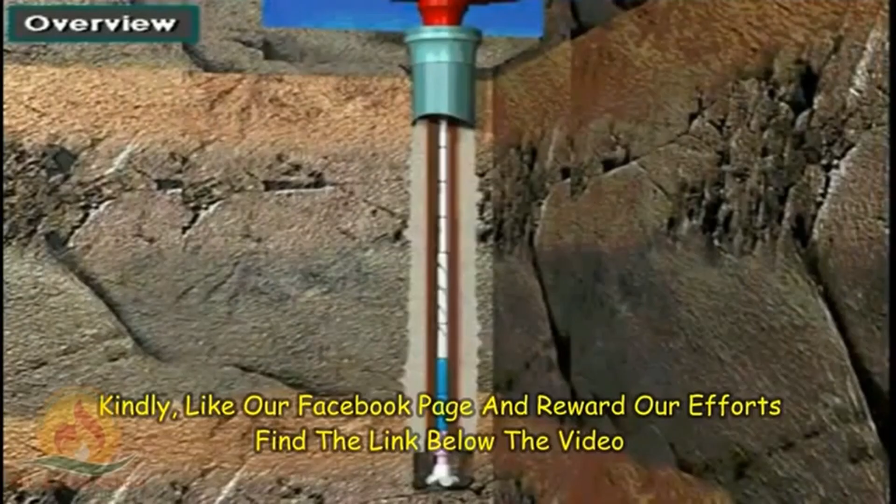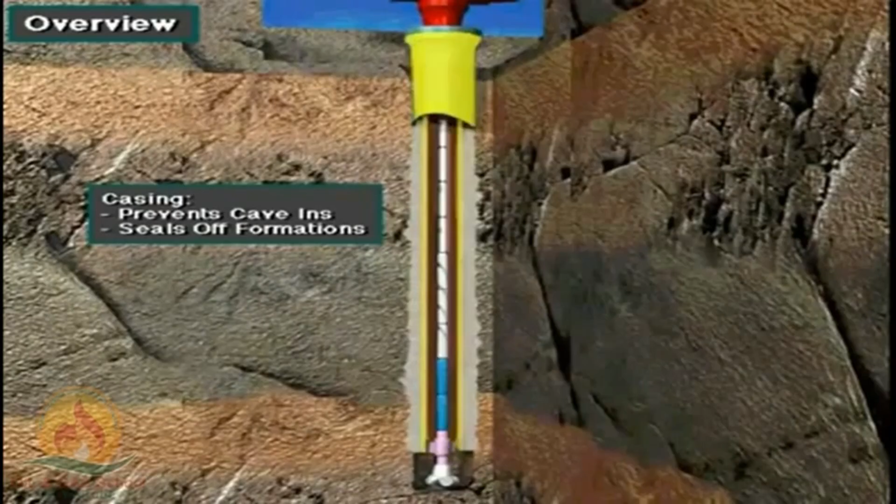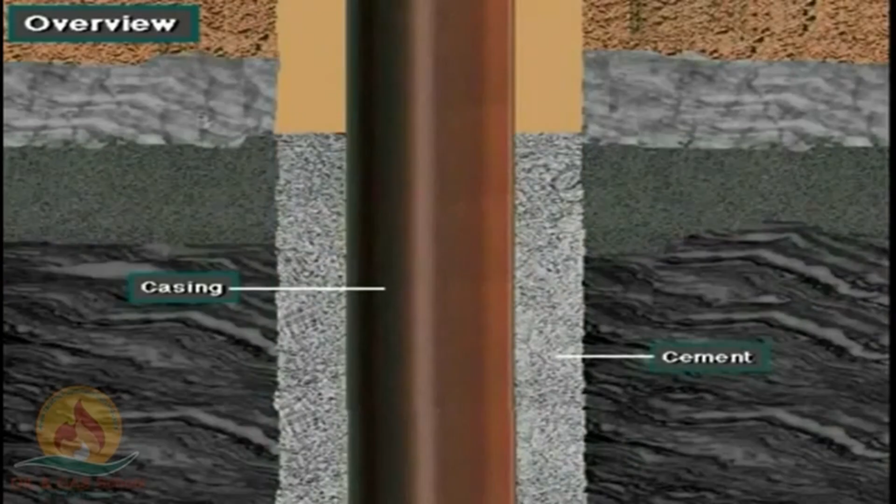Virtually every well drilled requires casing and cement. Casing is steel pipe that the crew puts into the well bore. The casing prevents the hole from caving in and seals off formations. To do its job, though, the casing has to be cemented in place. A cement crew pumps cement down inside the casing and up the annulus. The cement hardens or sets to hold the casing in place.

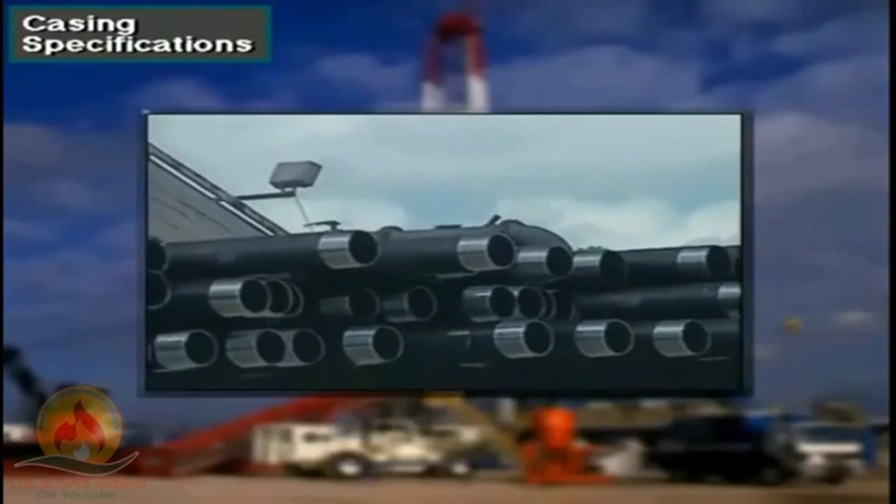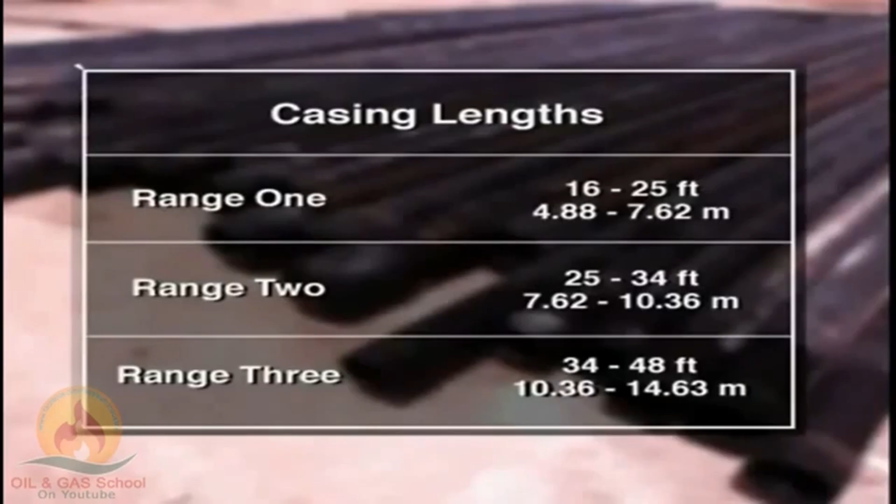Casing is steel pipe that comes to the rig in individual joints. A casing crew couples the joints together to run them into the well bore. Casing comes in 3 ranges of length.

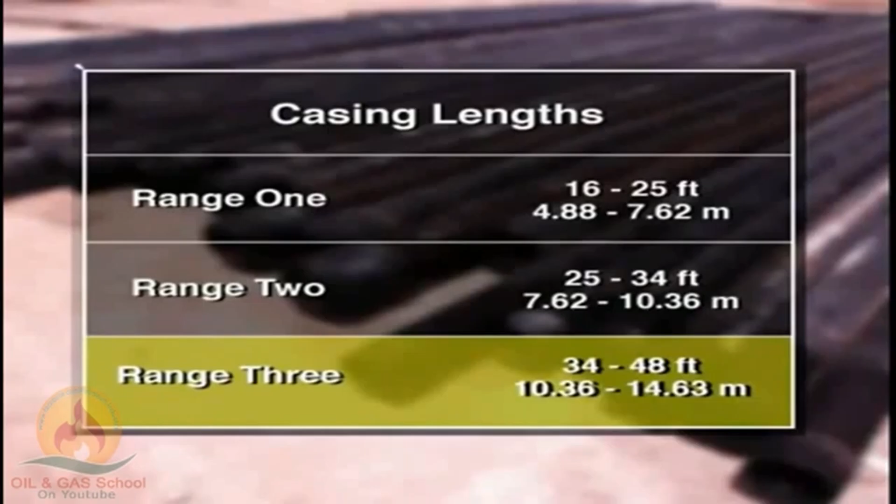Range 1 is 16 to 25 feet, or 4.88 to 7.62 meters long. Range 2 is 25 to 34 feet, or 7.62 to 10.36 meters long. Range 3 is 34 to 48 feet, or 10.36 to 14.63 meters long.

The length used depends on the well owner's requirement and the physical requirements of the well. Casing also comes in different grades or strengths. Which strength is used depends on the well's characteristics.

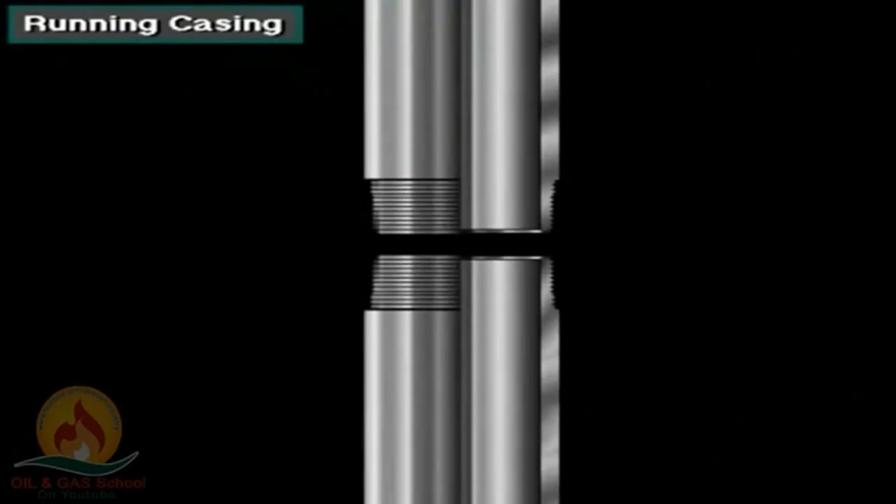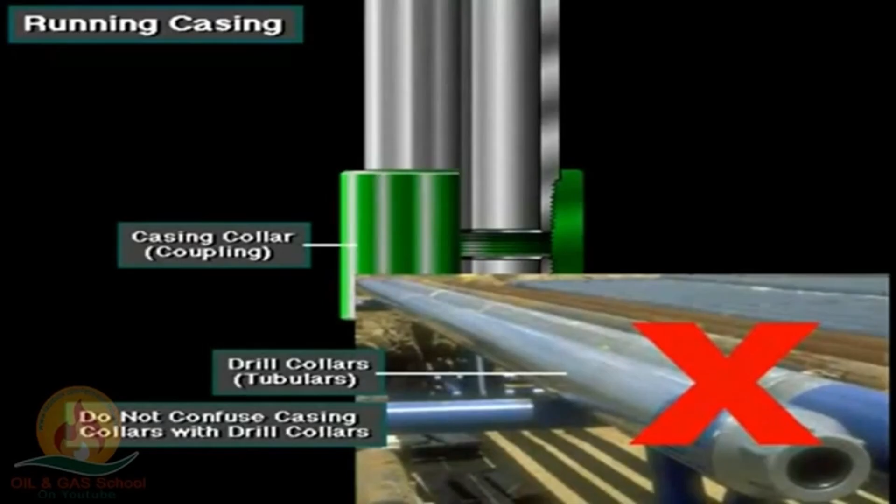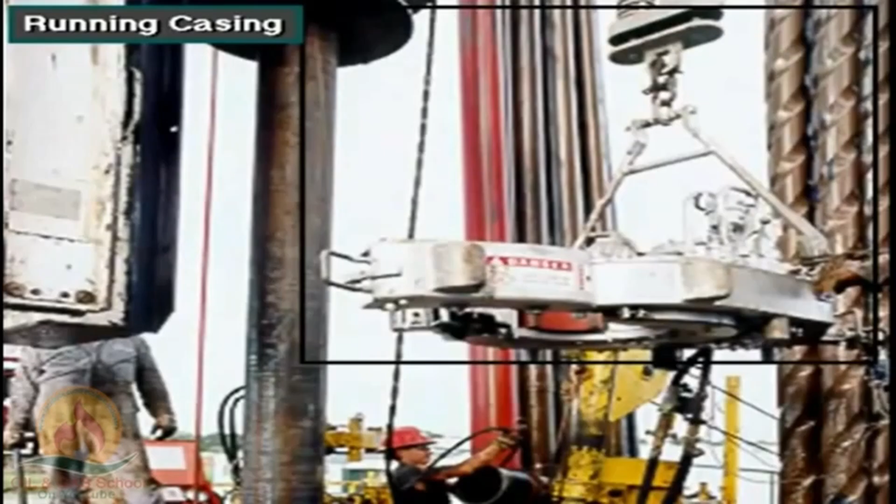To run the casing, the crew joins the joints with threaded connections called couplings or collars. Do not confuse casing collars with drill collars. Casing collars are couplings. They use special heavy-duty elevators and large casing slips, called spiders. They make up the casing joints with multi-speed power casing tongs. Power casing tongs not only screw the threaded connections together, but also torque them to the correct amount.

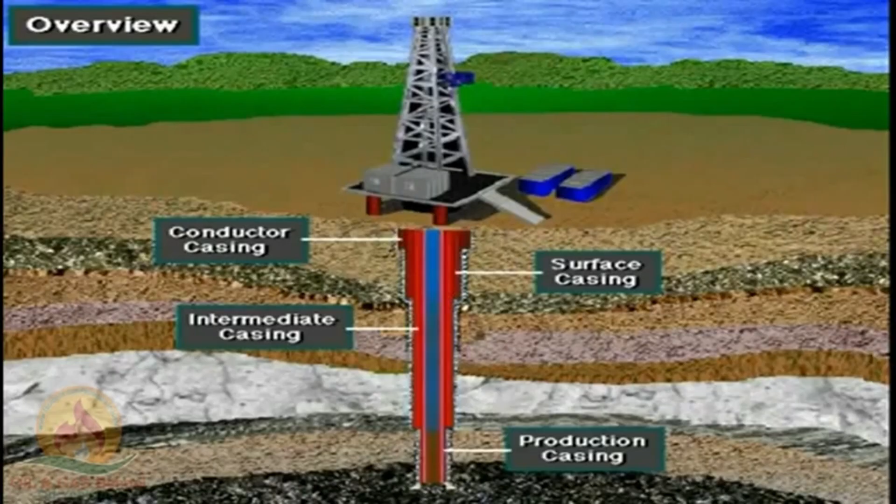By the time the crew drills the well to final depth, it usually has several strings of casing in it. These strings are called conductor casing, surface casing, intermediate casing, and production casing. Notice that the cased well looks something like a telescope pulled out to full length. That is, as the crew drills the well deeper, the size of the hole and the size of the casing gets smaller in diameter. Almost always, the drilling contractor cannot begin drilling at the surface and go all the way to total depth in one step.

For one thing, formations near the surface tend to crumble and cave in easily, so conductor casing prevents cave-ins. For another thing, formations near the surface may also hold fresh water that the well cannot contaminate. So surface casing protects freshwater zones.

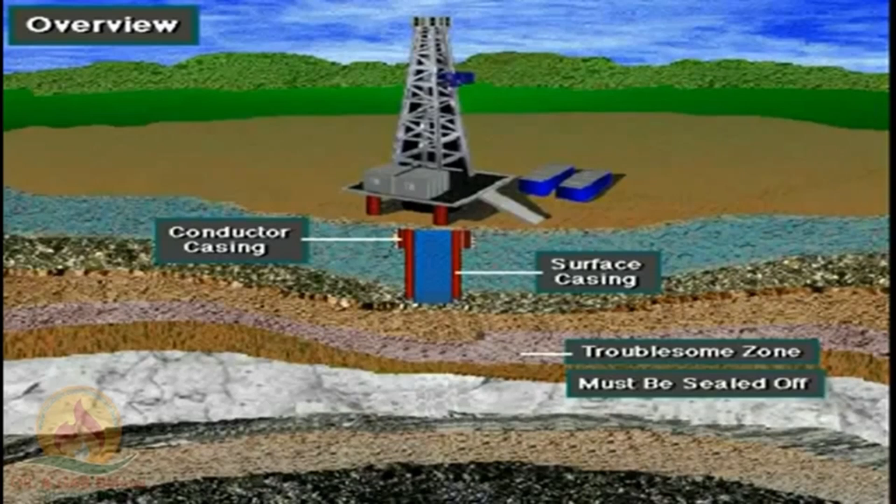For still another thing, deep formations are sometimes so-called troublesome formations. That is, they can be drilled by adjusting the properties of the drilling mud, but, once drilled, need to be sealed off to prevent problems in drilling the deeper portions of the well. So, intermediate casing seals off troublesome zones.

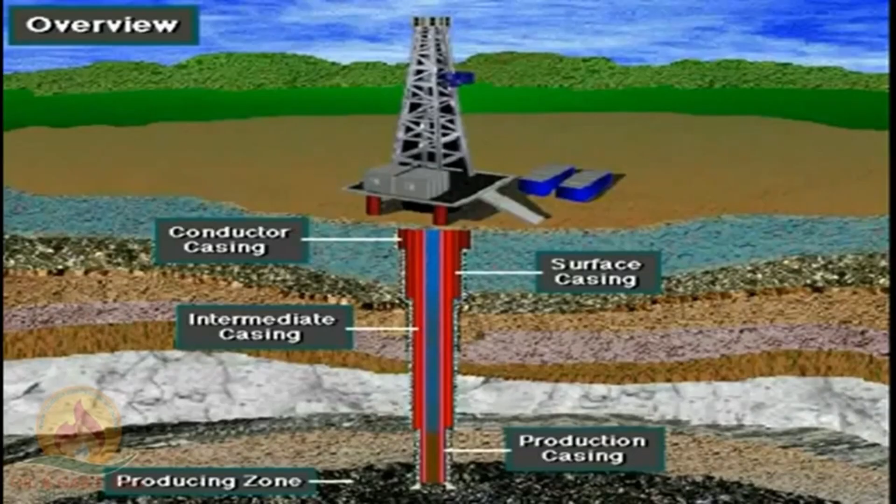Sometimes deep wells require more than one intermediate casing string. Finally, once the producing zone is drilled, it needs to be protected and sealed, so production casing isolates the producing zone. The first string of casing is the conductor casing.

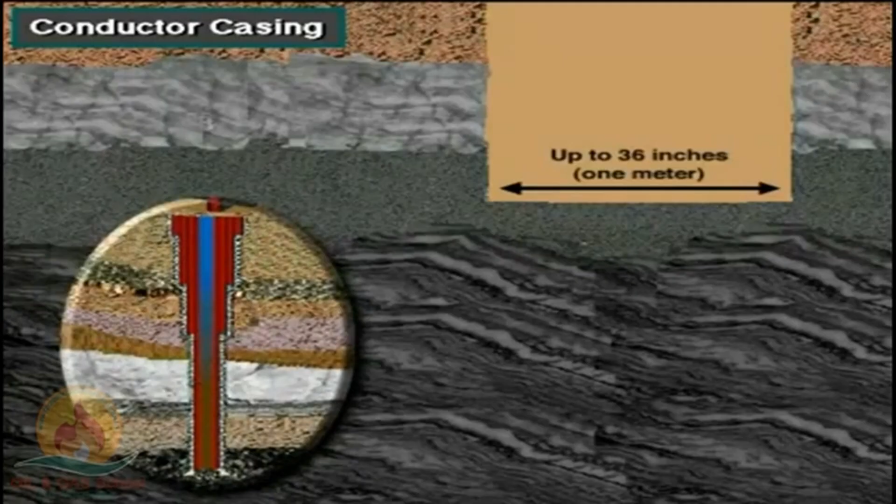The hole drilled for it is pretty big, often as much as 36 inches or more, almost a meter in diameter. The conductor hole has to start out pretty big because as drilling goes on, the hole's diameter decreases. In some cases, the rig will hammer the conductor casing in place if the ground near the surface is really soft. If the conductor hole is drilled, the casing is cemented in it.

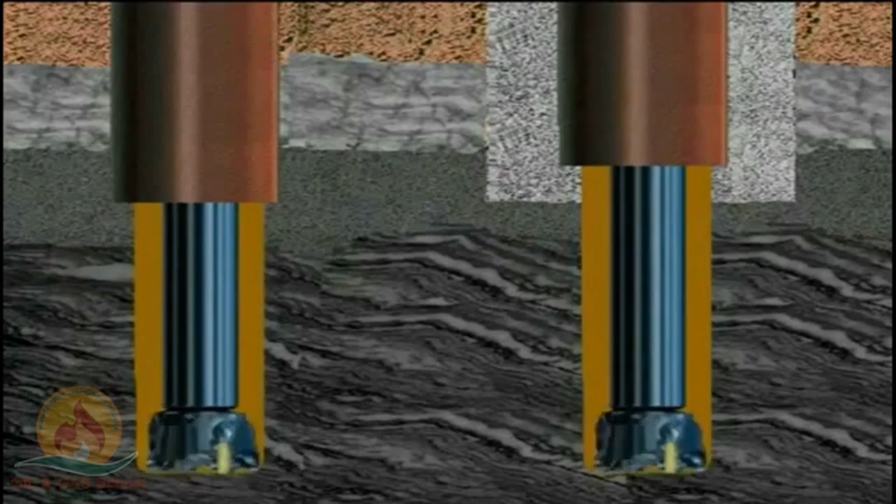Using a bit whose diameter is small enough to easily go inside the conductor casing, the rig drills the hole below the conductor to a prescribed depth. The diameter of the surface hole can still be relatively large, say 17 inches, over 400 millimeters or even more.

The surface hole's depth is usually set by regulatory agencies. They require that the surface hole be drilled through all freshwater zones, and that surface casing be set and cemented to protect the zones from damage by additional drilling operations. This depth could be from hundreds to thousands of feet or meters.

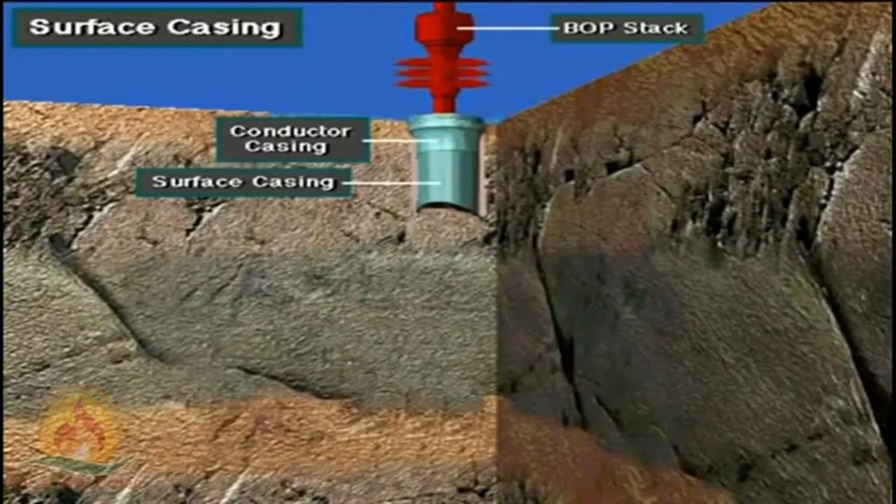Crew members nipple up or connect the BOPs to the surface casing at the wellhead. So this casing must be strong enough to support the BOP stack. In addition, it has to withstand the gas or fluid pressures the well may encounter. Surface casing also has to be strong enough to support the additional casing strings hung inside of it.

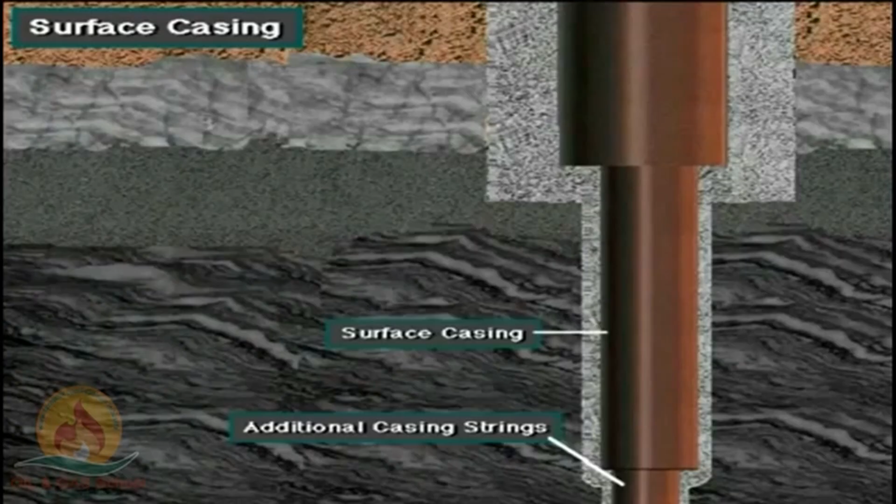To drill the intermediate hole, the operator chooses a still smaller in diameter bit, which easily fits inside the surface casing. A bit of about 12 inches, or 300 millimeters in diameter, is one example of the size. Intermediate casing is also cemented into place to seal off troublesome formations, like lost circulation zones or abnormally pressured zones.

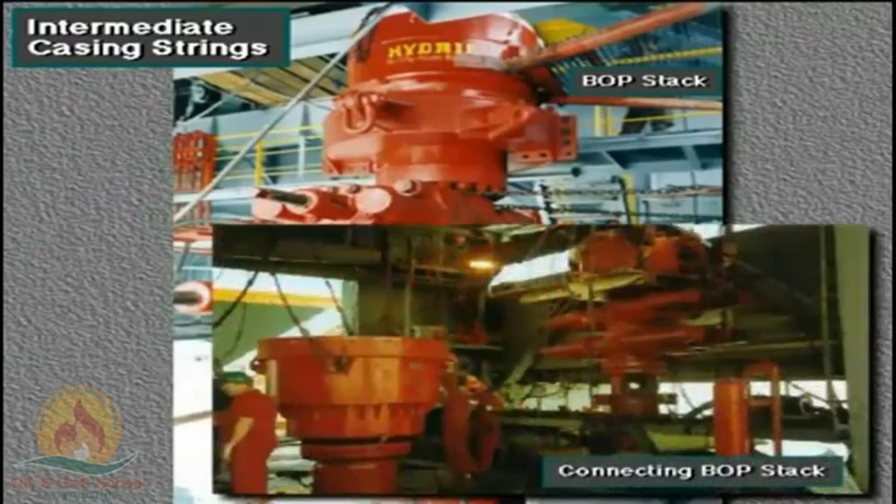It is often the longest section of casing in the well. The crew connects or nipples up the BOPs to the top of the intermediate casing using an adapter and casing head, or a drilling spool, which is stacked on or connected to the top of the surface casing wellhead. It therefore anchors the BOPs for the drilling that comes later.

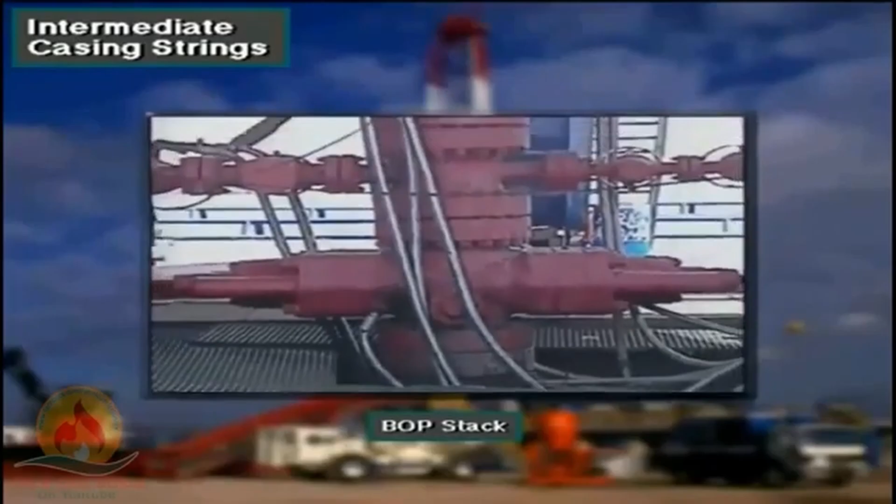Remember that the crew has to nipple up a stack of BOPs to each string of casing that is run into the well. First, they nipple up on the surface casing, then on the intermediate casing, and finally on the production casing.

To drill to final depth below the intermediate casing, the rig owner selects a bit whose diameter is small enough to fit inside the intermediate casing, say from 8 to 10 inches, or 200 to 250 millimeters.

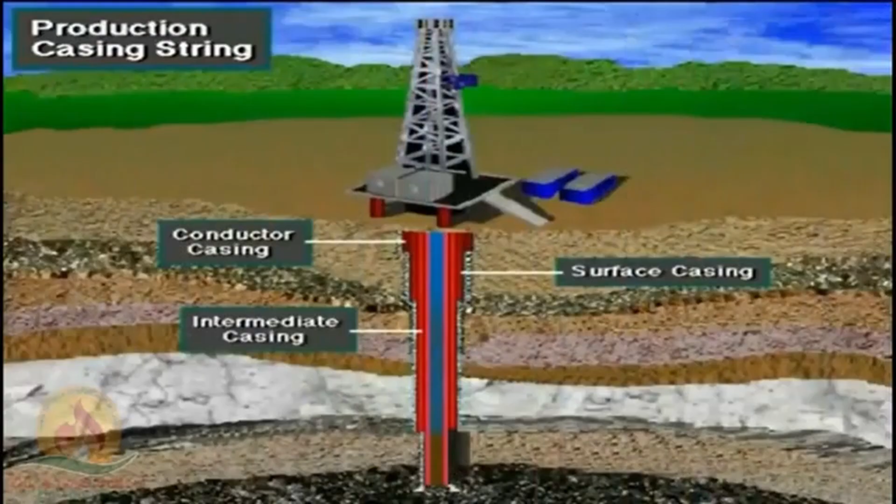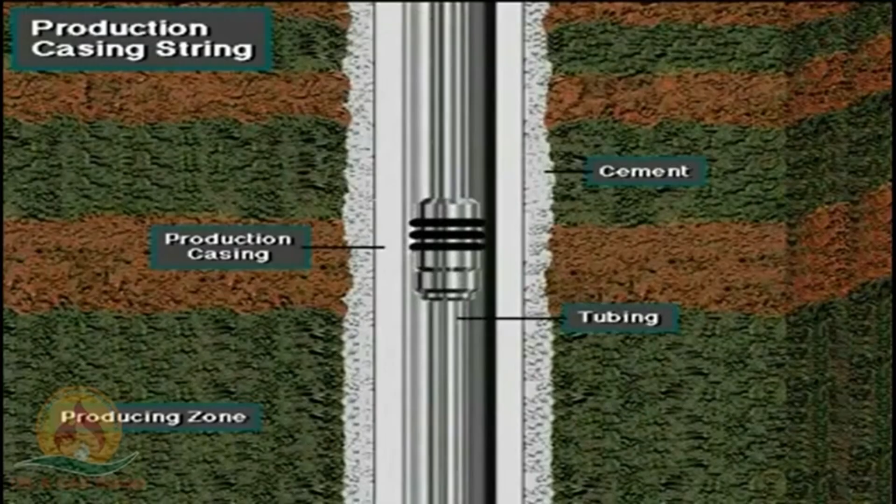This part of the hole penetrates the producing zone. When cemented in place, production casing seals off the producing zone and readies it for production. Production casing also houses and protects the tubing and other equipment used to produce the well. The operator usually perforates, puts holes in this casing, when the well is completed or ready for work to begin.

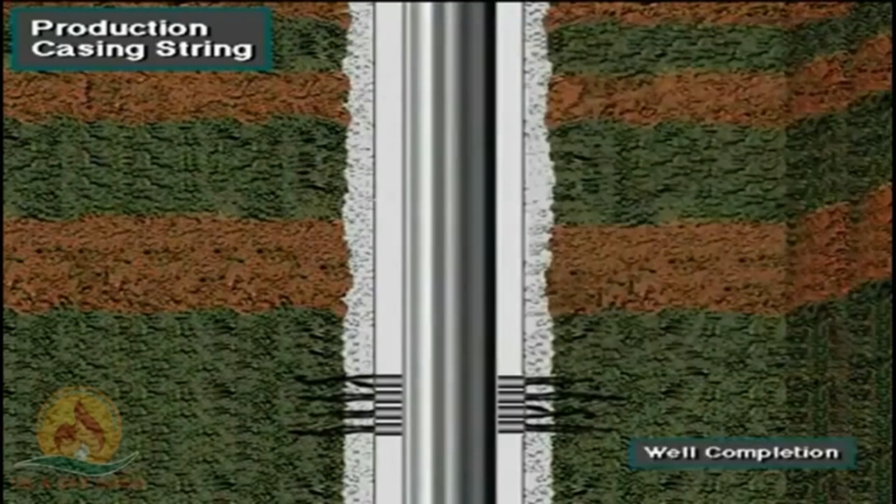Well completion is the term describing the activities and methods of preparing the well for production of oil and gas. Oil and gas flow into the well through the perforations.

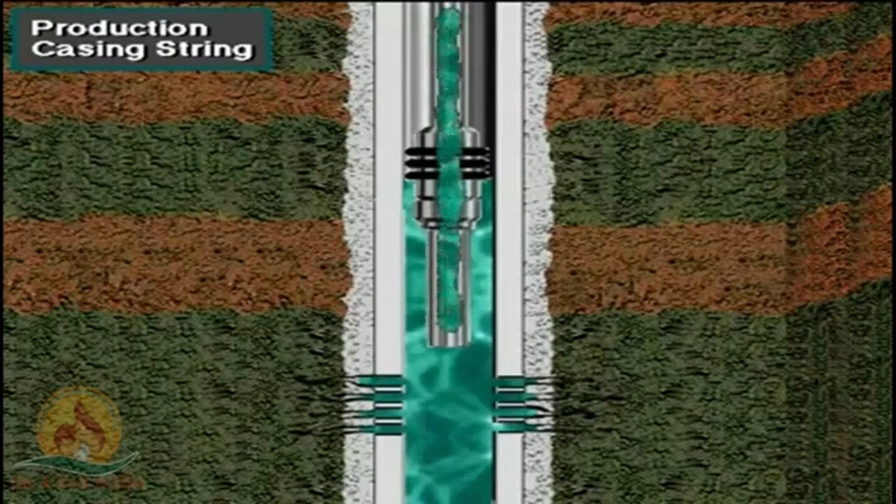Sometimes well owners run liners instead of casing into the well. A liner is a shortened string of casing used to case the smaller open hole section below an existing casing string in the hole. It's just like casing, except that a liner does not run all the way to the surface. Instead, the casing crew hangs it from the bottom of a previously run casing or liner string using a special piece of equipment called a liner hanger.

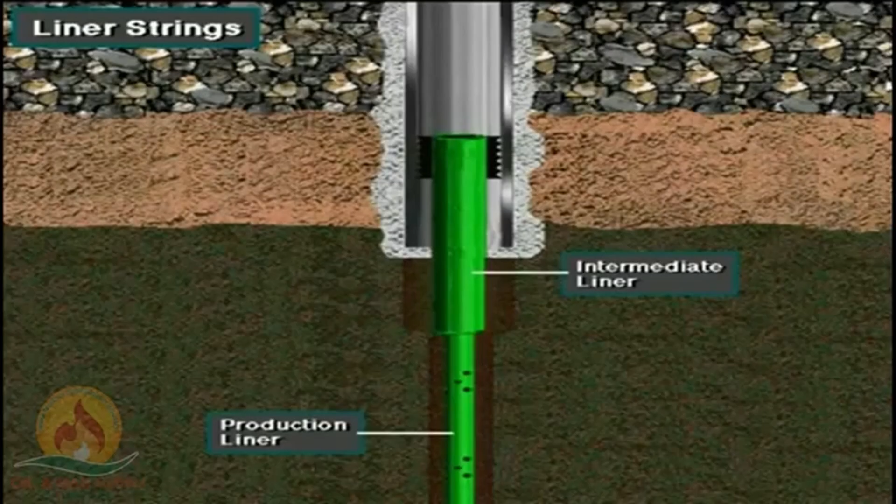In this case, there's an intermediate liner and a production liner. Using liners saves money. Because the crew will cement the casing string in place, they also have to install some special devices on the string, which come into play during the cementing operation.

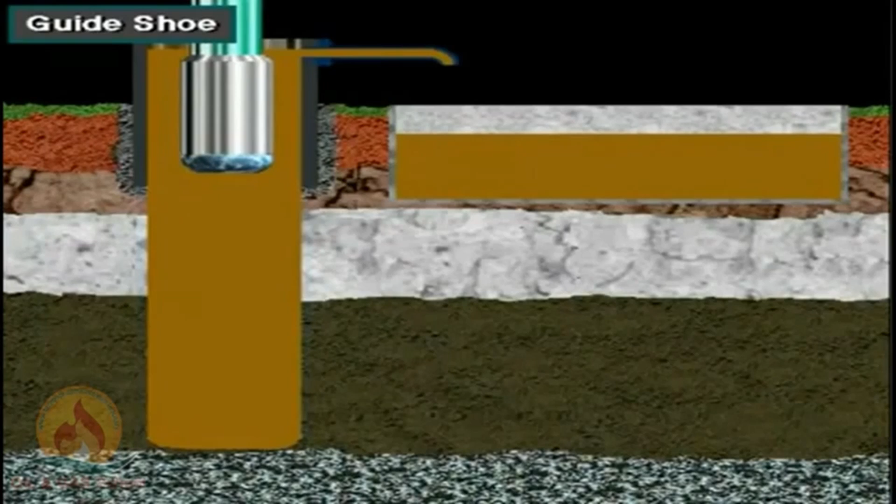The guide shoe is a heavy steel and concrete fitting that the crew makes up on the end of the first casing joint to go in the hole. It guides the casing past rough spots and ledges in the wellbore. It also has an opening in the end. Drilling mud enters this opening when the crew runs the casing into the wellbore. Later, cement will come out of this opening on its way into the annulus.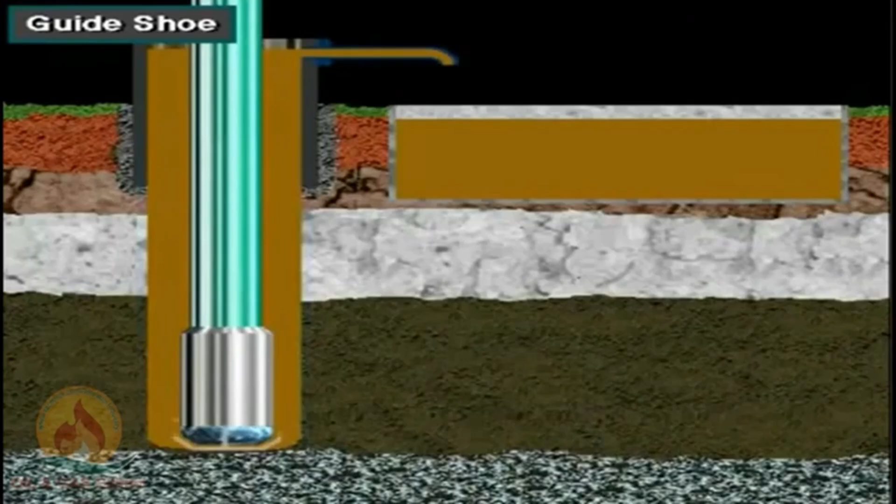Usually, the crew installs a float collar in the second or third casing joint run into the wellbore, or sometimes they install a float shoe. Whether a float shoe or a float collar is used, each has a one-way valve in it. Fluids can flow downward through the valve, but cannot flow upward past the valve.

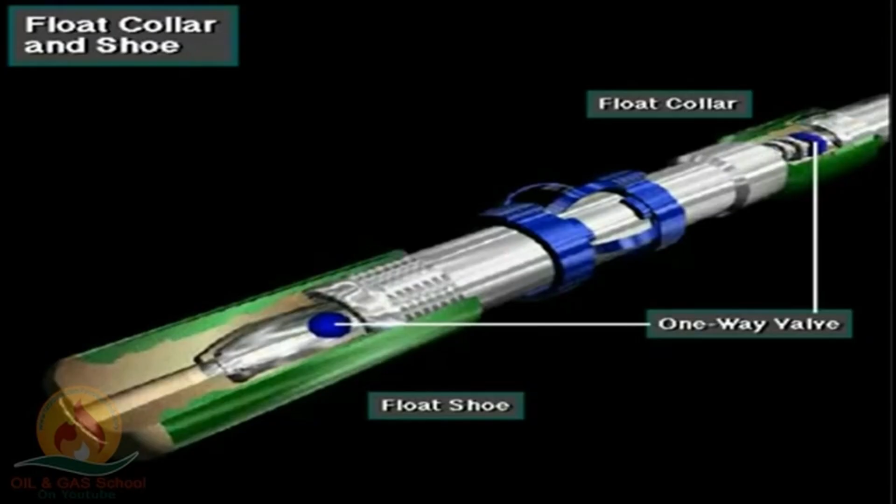The float collar or float shoe keeps drilling mud from entering the casing string as the crew runs it into the hole. Keeping the casing empty of mud allows the casing to partially float in the mud, that is, in the annulus, just as a hollow steel boat floats on water.

Letting the casing float cuts down on stress and fatigue on the hoisting equipment, but the crew cannot keep the casing totally empty of mud. If they did, the hydrostatic pressure of the mud in the annulus could crush the casing.

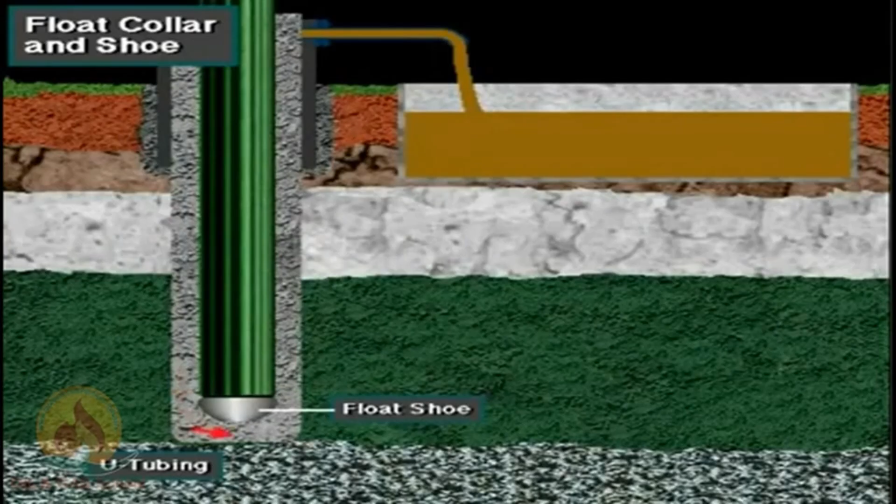So from time to time, the crew puts mud into the inside of the casing from the surface to offset hydrostatic pressure. The float valve also holds the cement in place once it is displaced into the annulus. Otherwise, it would U-tube back into the casing.

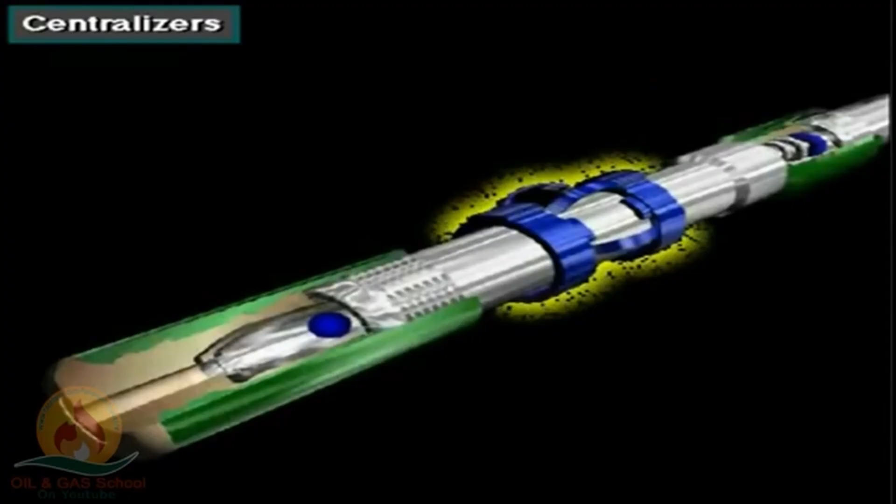On various joints of casing, crew members also install centralizers. Centralizers keep the casing from leaning against the side of the hole. In other words, centralizers keep an opening between the outside wall of the casing and the wall of the hole.

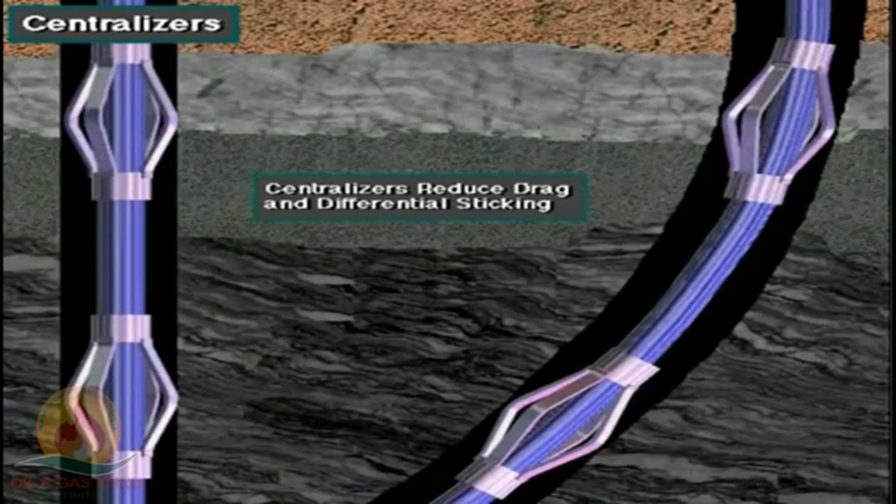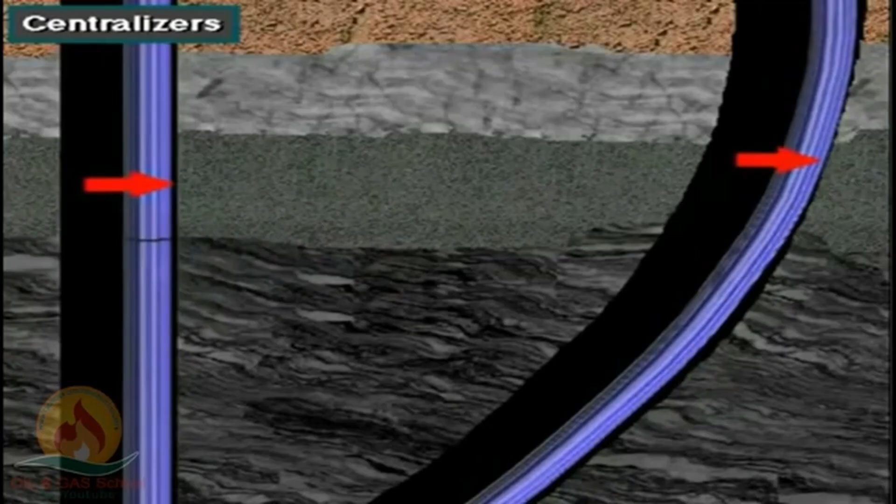Centralizers reduce drag and differential sticking while running the casing. Drag is resistance to motion caused by the casing contacting the wellbore. Differential sticking happens when the casing contacts a permeable formation in the wellbore, and the pressure in the hole is greater than the pressure in the formation. The higher hole pressure tends to hold the casing in contact against the area of lower formation pressure.

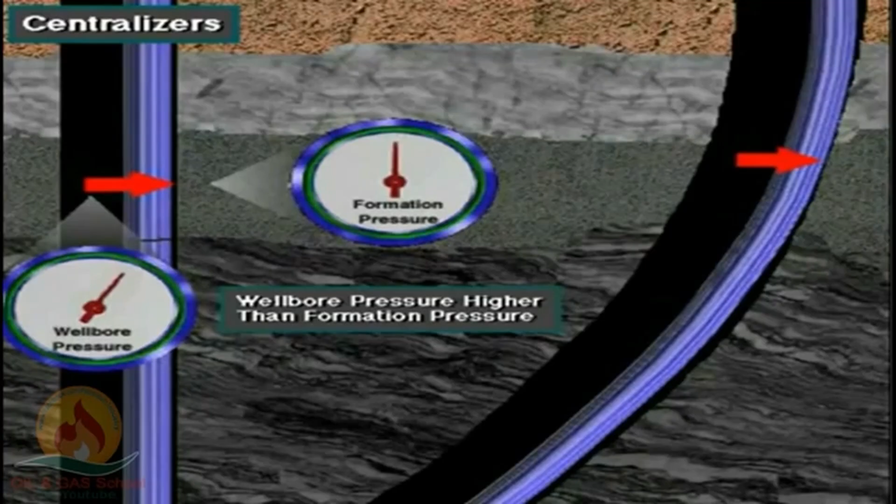Keeping the casing off the wall of the hole also ensures that cement will surround the outside of the casing and bond it securely to the hole.

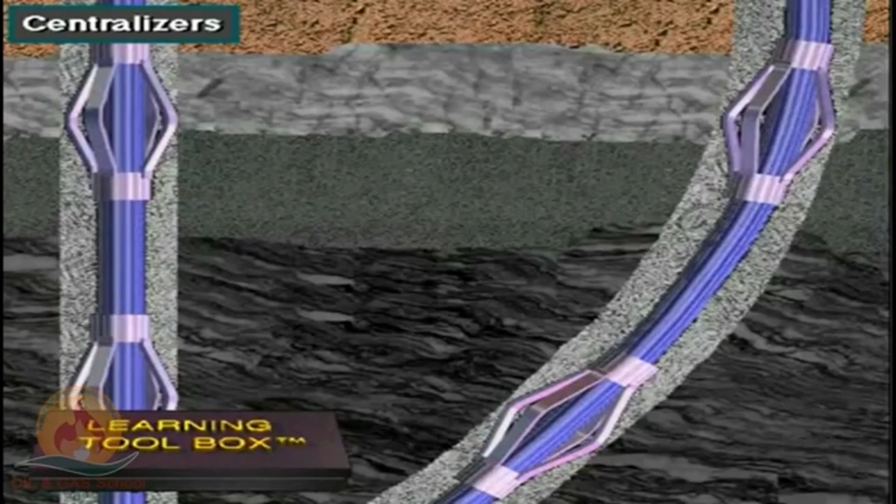Another device that helps ensure a good bond of cement to the hole is a scratcher. Depending on the wellbore's characteristics, crew members install several on the casing string. Just before they pump the cement into the casing and hole, they rotate the casing string, or move it up and down, that is, reciprocate it, depending on the type of scratchers they install.

In either case, the scratchers remove wall cake left by the drilling mud during drilling. Removing the wall cake, solid particles in the mud that stick to the wall of the hole, helps the cement bond better to the hole.

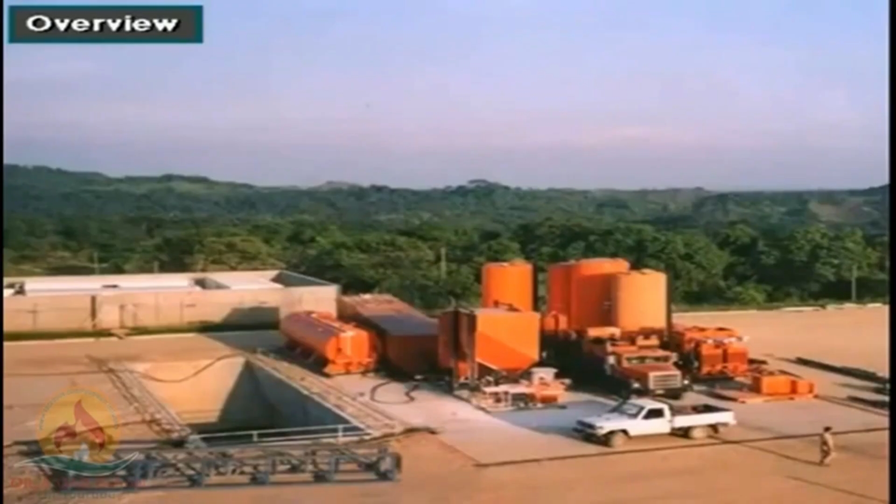Here is an overview of casing cemented in a well. Called primary cementing, the cement's main jobs are to completely isolate, or totally seal off, all the oil, gas, and water zones from the wellbore, and to bond the casing firmly to the wall of the hole.

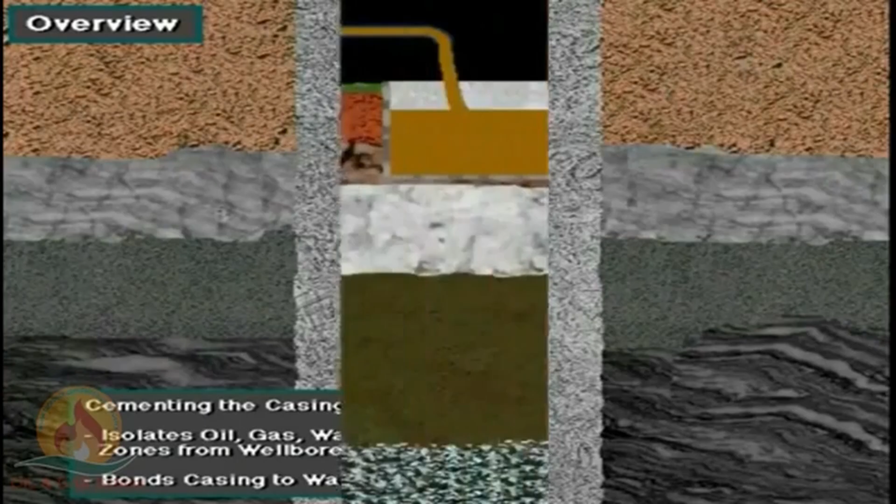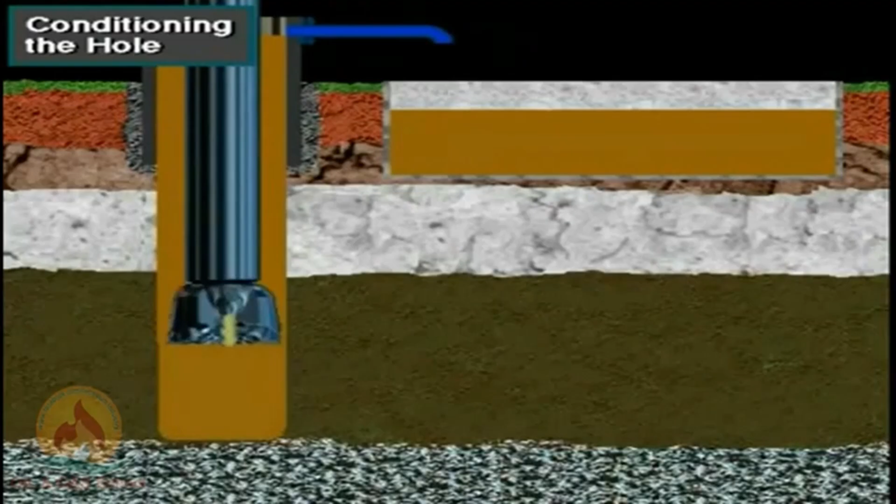Here, the crew has drilled the well to the casing point, the depth at which they will set and cement casing. The driller circulates drilling mud to clean the hole and to make sure the mud is in good condition. Then, the crew pulls the drill string out of the hole.

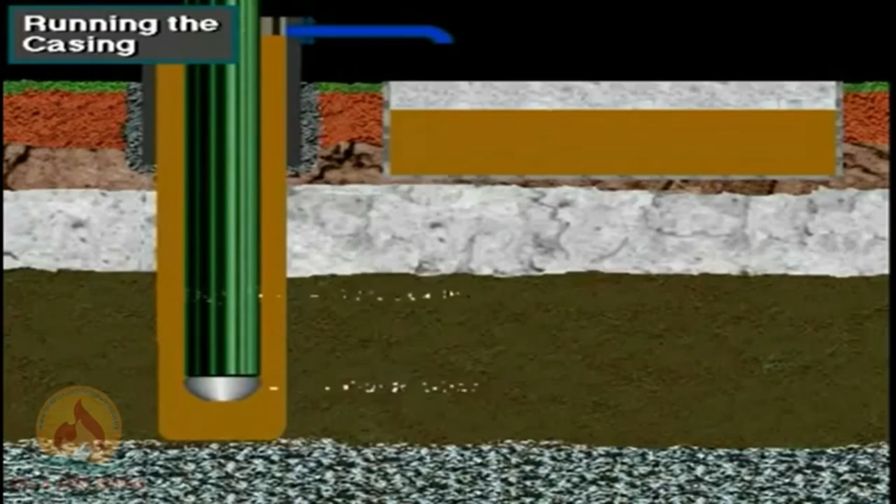The next step in primary cementing is for the casing crew to run the casing into the well, one joint at a time. Notice at the bottom of the casing the guide shoe and float collar. Also notice the centralizers and scratchers.

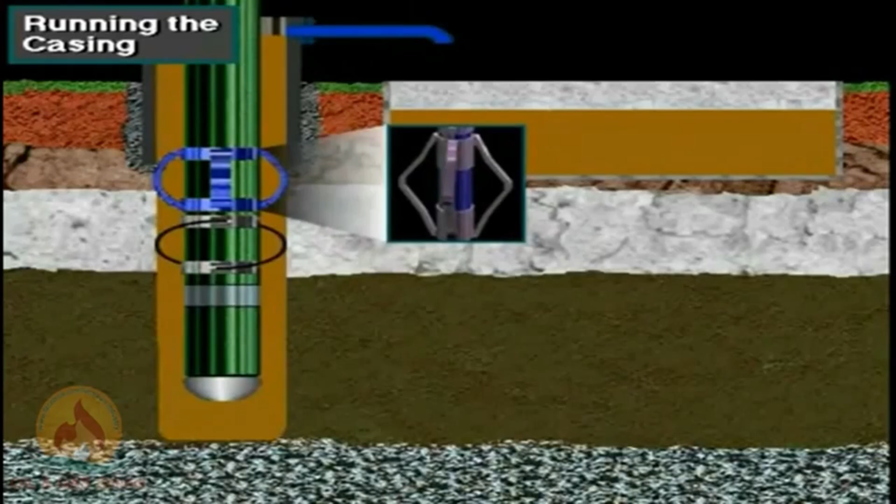The guide shoe guides the first joint of casing into the wellbore. A valve in the float collar lets the crew float the casing into the well to lessen the load on the rig's hoisting system. Centralizers keep the casing off the wall of the hole to ensure a good cement job. And scratchers remove wall cake to ensure a good cement bond to the wall of the hole.

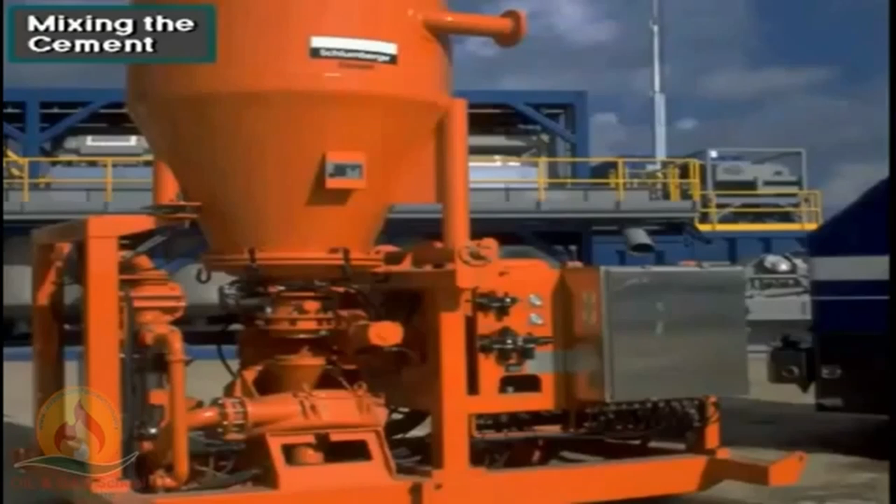The cementing crew next readies a cementing unit. The cementing unit rapidly mixes water, dry cement, and special additives to the cement to make a liquid cement slurry. A high-pressure cement pumping unit moves the slurry down the casing.

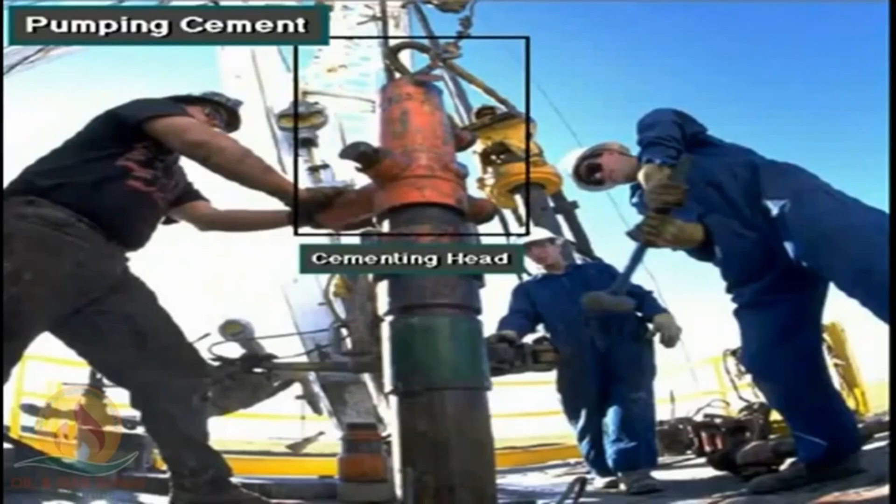To get the cement slurry down the casing, the cementing crew makes up a cementing head, also called a plug container, on the top joint of casing suspended in the rig's elevator. The cementing head has an inlet for the cement slurry from the cement pump. Slurry enters the head at the connection on the side.

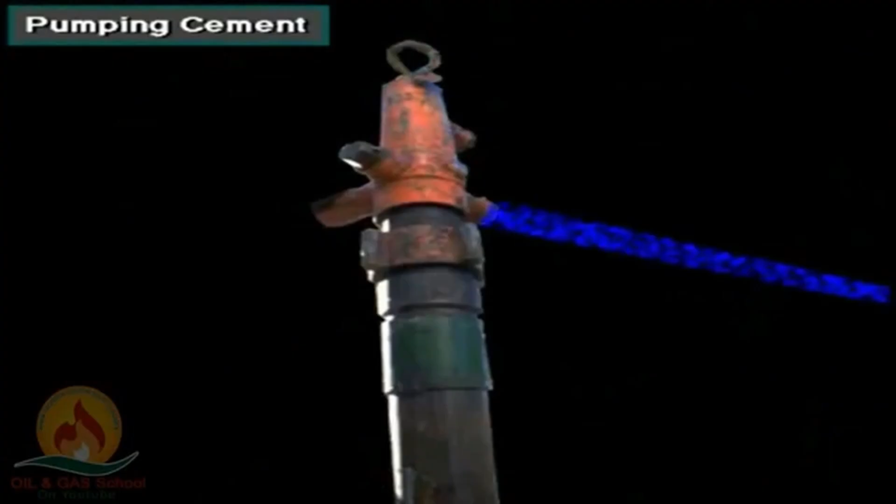The valves on the head allow the crew to control the point at which the slurry enters the head. From the cementing head, the slurry goes into the casing.

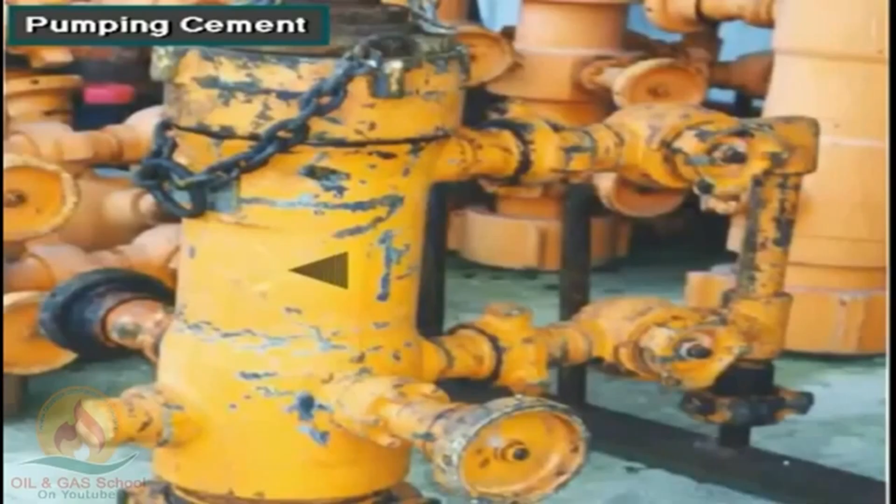The head also holds special plugs called wiper plugs. The wiper plug retainers keep the wiper plugs in the head until the crew releases them to allow the plugs to be pumped down the casing. The fluid inlet allows the crew to pump mud, water, or a special displacement fluid, the fluid that pushes the cement into the annulus. This head holds two wiper plugs, a bottom wiper plug and a top wiper plug.

The bottom plug goes into the casing first. It wipes mud off the inside of the casing and separates the mud from the cement. The top plug follows the last of the cement into the casing. It wipes cement off the inside of the casing and separates cement from the displacement fluid.

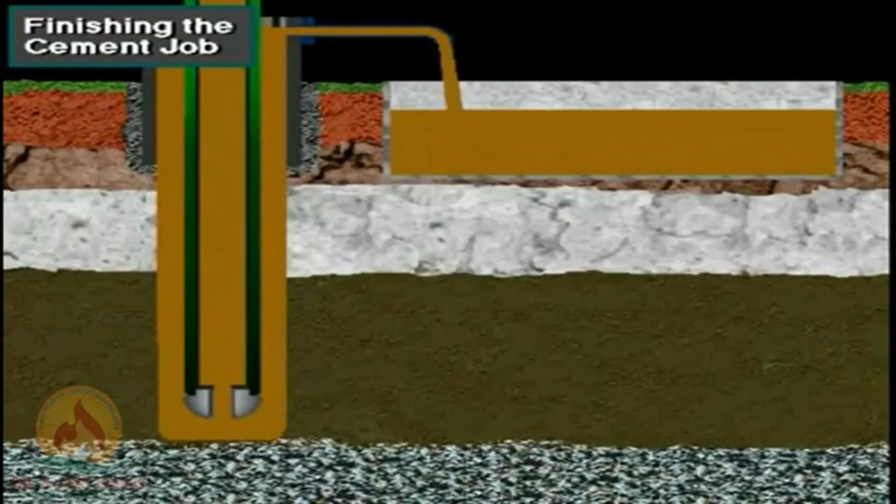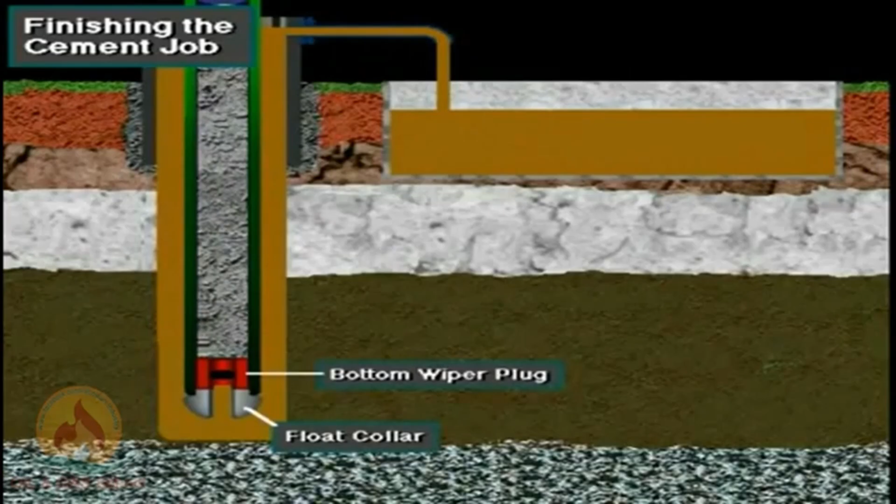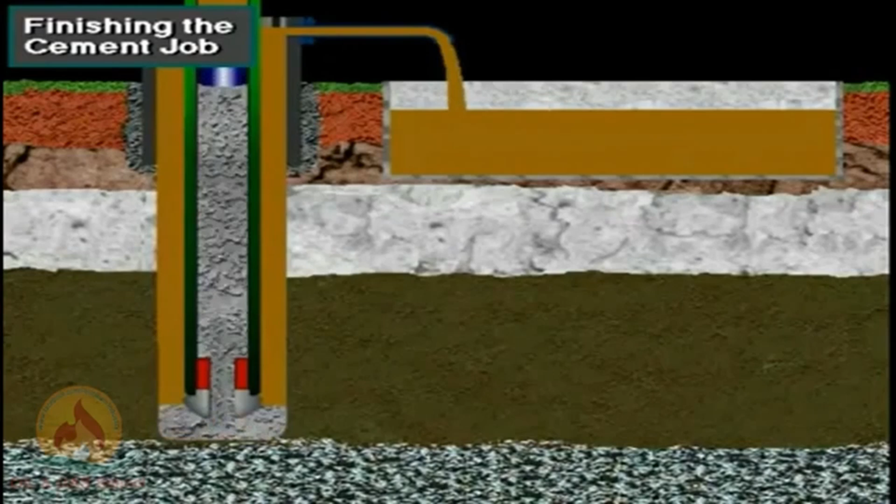Cement pump pressure moves the cement slurry to the cementing head, where a crew member releases the bottom wiper plug. Slurry pushes the bottom plug down the casing until it seats in the float collar. When the plug seats, continued pump pressure on the slurry ruptures a diaphragm on the top of the plug. This allows cement slurry to go out the guide shoe and into the annulus.

When the calculated amount of cement slurry has been pumped, a crew member releases the top wiper plug. Displacement fluid forces the top wiper plug down the casing until it seats in the float collar on top of the bottom plug. Because the top plug is solid, pump pressure rises when the plug seats. A sharp rise in pump pressure signals the pump operator to shut down the pump.

The float valve holds the cement in place, not allowing it to U-tube back into the casing once it is displaced into the annulus. The cementing job is complete. Depending on hole conditions and the type of cement used, the cement slurry hardens or sets up firmly, generally within 12 to 24 hours.